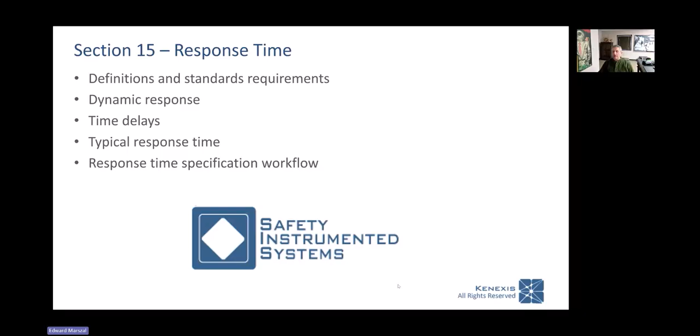Again, this is the SIS training class out of the Kenexis Process Safety Training Center. So a couple things as we start down this timing requirements issue: we're going to start out with some definitions, and then we're going to move into how you determine what this number is for your particular plant.

So we're going to start out with that definition of process safety time. I've mentioned to you before that process safety time is a phrase that is going obsolete. Now, we didn't change the definition of process safety time, because this is embedded - people have been documenting process safety time for over a decade, maybe over two decades. So we can't really change the definition. We needed to create a new one.

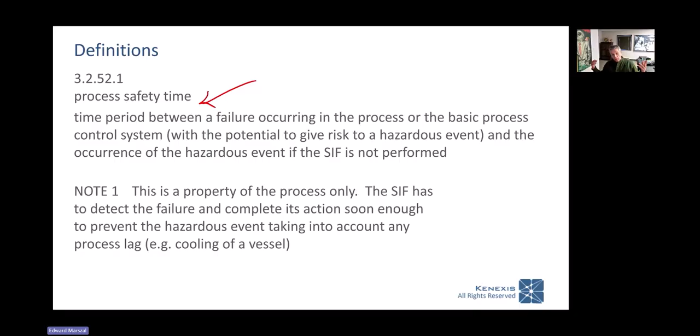So let's start with the definition itself. Process safety time is the time period between a failure occurring in the process or the basic process control system with the potential to give rise to a hazardous event, and the occurrence of the hazardous event if the SIF is not performed. So it's basically how much time elapses between when I have my initiating event failure and when I have my consequence - when I have my explosion, when I have my fire.

That's great. And we have been taught for time immemorial that your safety instrumented function needs to activate faster than your process safety time, which is true - it's always true. But it actually needs to activate a lot faster than your process safety time in a lot of cases, because there is a time that elapses between when my initiating event occurs and when my safety instrumented system knows that it has occurred. And you can't take credit for that amount of time when you're defining what your required safety function performance time, activation time, is going to be.

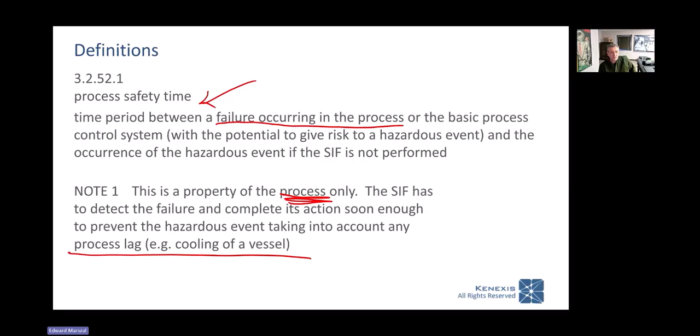Think about a safety function where when you detect that the temperature in your reactor has gone high, you're going to want to flood a cooling jacket with cooling water to try to cool the reactor down. Well, it's going to take some time between when you turn your cooling water pump on and when you actually start to cool the process down - so those kind of process lags. Well, it turns out that there's a lot more lag than just the process lag. I'm going to show you a chart that tries to list all these things out and lets you know what you can actually take credit for.

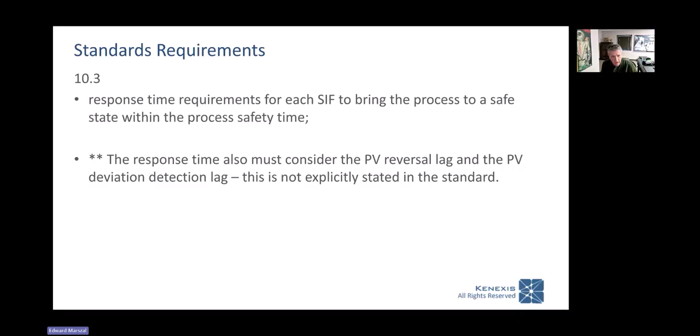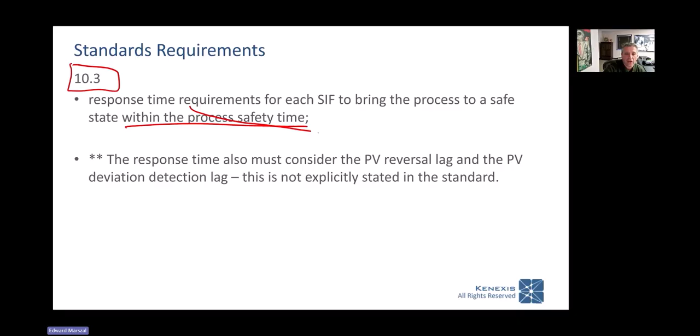All right, some other definitions - or actually it's not a definition, it's a standards requirement that says in clause 10.3, everybody knows that's the list of SRS items, the list of things that you need to document in the SRS to be compliant with the standard. It says one of the things you need to document is the response time requirements for each SIF to bring the process to a safe state within the process safety time. And let me tell you, hear me now and believe me later: the next version of the IEC 61511 standard is not going to say process safety time. It is going to say MERT.

MERT is going to be maximum equipment response time. I was getting ready to write that up on the screen, but I won't. We'll get into that.

There's an extra piece of information here that's not specifically written into the standard, which is that response time needs to include a lot of other items. There's this thing I refer to as the PV reversal lag. When you start injecting cooling water into your reactor, the temperature doesn't immediately drop. As a matter of fact, the temperature is probably going to continue to go up for a while before that cooling water takes effect. That's the PV reversal lag, and that's what the process lag here in note 1 of the process safety definition was talking about.

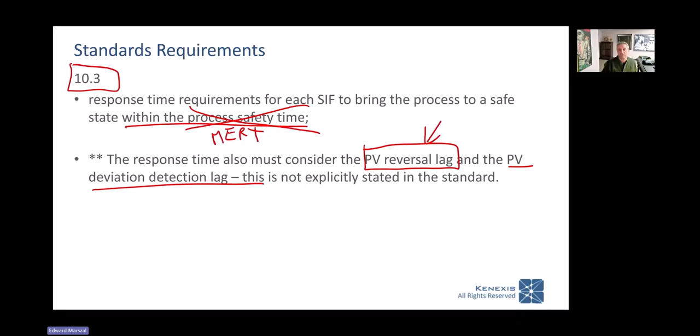There's also the PV detection lag, which is how much time elapses between when my initiating event occurred and when my safety instrumented system actually knows that it has occurred. So when we start talking about MERT in the next version of 61511, the MERT is going to definitely pull this PV detection lag out.

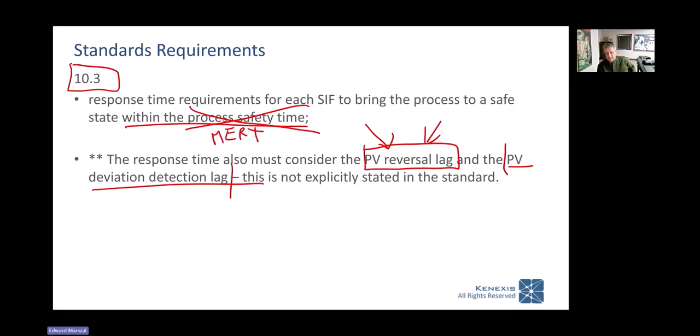We're not completely done with the modifications. I think we need to talk a little bit more in the standard, maybe in the informative annexes, part 2, about the need to consider this PV reversal lag also.

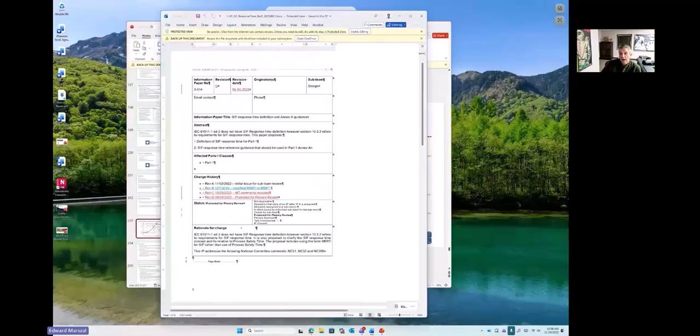Okay, so this is an information paper. What an information paper is, is someone suggested a change to the 61511 standard, and we flesh out what that change needs to be. We discuss it internally, we vote on it, we change it again, and so on. So what you're looking at, we were working on this at our Krakow meeting in Poland last year.

Title: SIF response time definition and Annex A guidance. And basically there's an abstract of what we're doing. We basically said, well, we're looking at the definition of SIF response time in part 1, and we're looking at the definition of SIF response time in Annex A. And it all started out with someone saying, hey, SIF response time doesn't have a definition.

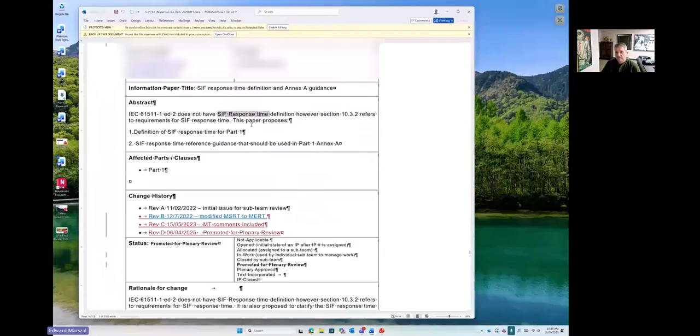So in the next version of the 61511 standard, little secret - well, it's not a secret because I'm showing you - we're going to have a definition for SIF response time. Change history, rationale for making the change.

So we said, well, basically someone on one of the national committees - so the ISA 84 is the national committee for the United States that contributes to the IEC 61511 standard - there were 3 different national committee comments to the tune of, you guys don't have a definition of SIF response time in the standard. You should probably clear that up.

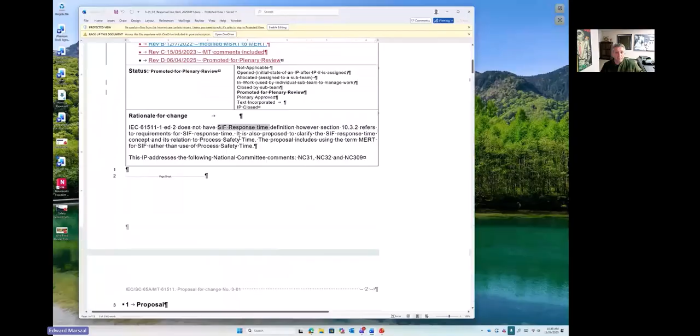And while we were in the process of clearing that up, we said, you know what, the definition of SIF response time is kind of sloppy, maybe we should change it. Long story short, we decided not to change it because there are thousands of companies all around the world that have SIF response time in their corporate standards and procedures and documents. So we can't change it. So we had to come up with a new term called MERT, maximum event response time.

So then basically what you're looking at, and you're going to see people in the standards committee over on the left-hand side, we kind of sketch out how do we want to change what's in the standard, just a little bit at a time. So for SIF response time, this is all going to get added. Or actually, we're changing the definition, we're changing the note.

And even the definition of diagnostics has changed to say that they need to be frequent in relation to the MERT, as opposed to frequent in relation to the process safety time. And then now we have this new definition of maximum event response time.

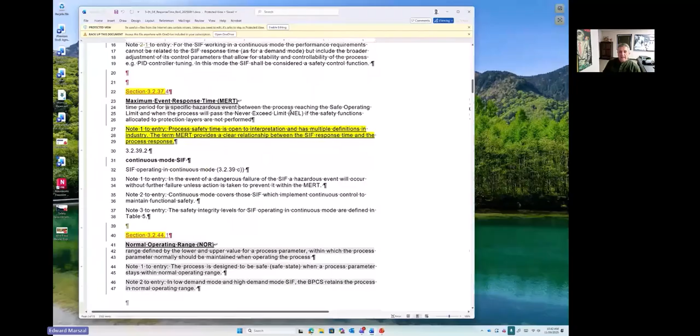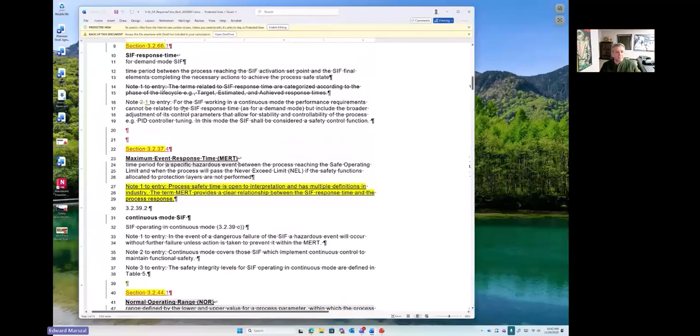So now when we're defining the SIF response time, we're going to want to make sure that the SIF will activate faster than the MERT. So what is the MERT?

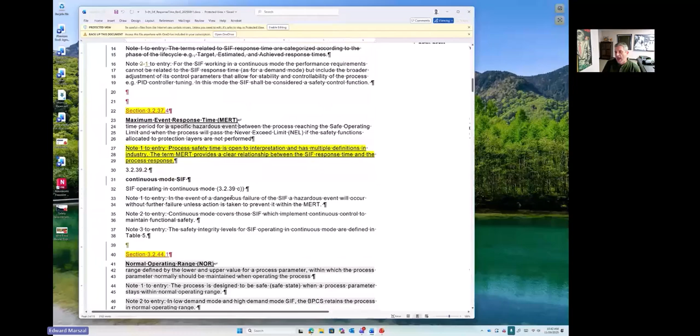It's the time period for a specific hazardous event between the process reaching the safe operating limit and when the process will pass the never exceed limit, if the safety functions allocated to protection layers are not performed. So key here is safe operating limit and never exceed limit.

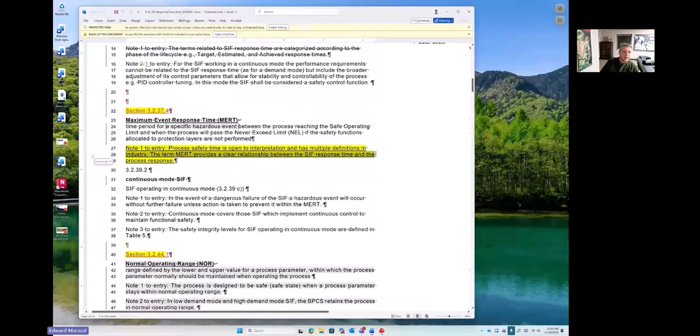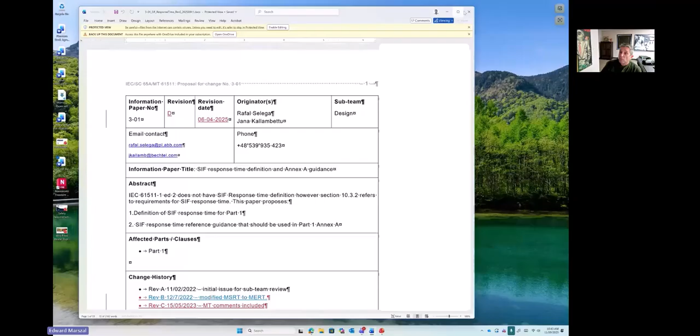So that's what's coming up in the next version of the standard. Now there's a bunch of other stuff that we played with in here, which, you know what, you're just going to have to wait till the next version of the standard is released to get into all those details. I've already told you too much.

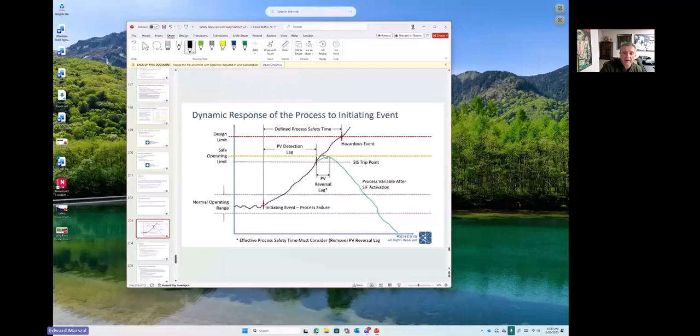Okay, let's jump back in. Actually, let me erase what I just scribbled here before I jump back into the presentation.

Now, some of the other things that you need to think about in this whole process safety time, maximum equipment response time, SIF response time discussion is time delays. So when you're defining a time delay, that time delay is part of the SIF response time.

So if my sensor activates in 300 milliseconds, but I put a 2-second time delay on the safety function, it's not actually responding in 300 milliseconds. It's responding in 2,300 milliseconds. So time delays need to get added up and become another portion of your SIF response time, and you cannot exceed the SIF response time considering the time delays that you put in.

Now, time delays are very valuable. They prevent signal noise from causing shutdowns, short duration anomalies from activating safety functions and potentially putting you into a more dangerous condition. Sometimes you'll be able to perform a manual action if the process safety time is very large.

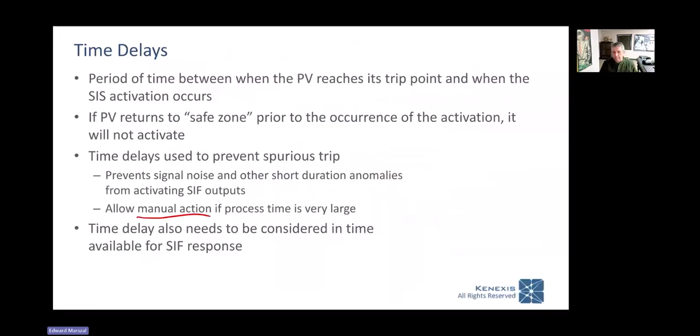So again, that time delay that you're putting in, do not forget that that is part of your SIF response time that you need to calculate and make sure that does not exceed that MERT, or maximum equipment response time.

Okay, so I've got a couple more slides here, and then we're gonna go in and do a deep dive into the fired heater side of the fence. So you've got two options for setting your response times.

The first one, which a lot of you... I could put another one down here, that is guess. Because I was kind of thinking, well, what is the one that's most commonly done in the process industries? And I hate to say it, it's probably this one down here: someone who was a systems integrator, instrumentation and control engineer, putting together the SRS just threw a number down because they needed to get a deliverable out the door. How do you like that for scary? But hey, I'm just telling the truth. I'm just telling you what I've seen out there.

Now, other than your systems integrator guessing what the process safety time is, let's talk about reasonable, rational ways to figure out what the process safety time is.

The first one is the fully quantitative. And being an engineer, engineers love them some fully quantitative. They love their spreadsheets, they love their simulation tools, and they're going to want to run calculations. The fancier the model, the better. Computational fluid dynamics, bring it on.

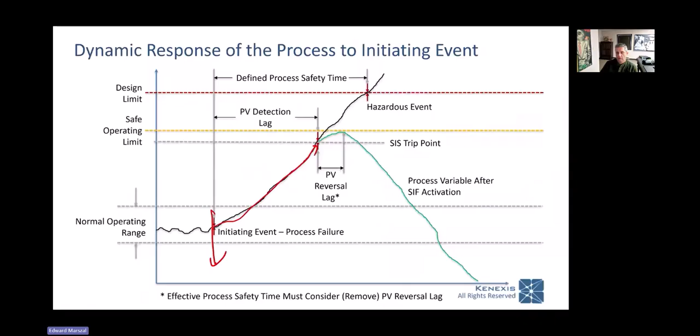Okay, now coming back to fired heaters, there are a few methods that you can use to do a dynamic simulation of what happens inside your firebox. The most sophisticated one would be to use computational fluid dynamics to look at what the fuel gas versus air versus flammable mixture concentration is inside the firebox after you lose your flame.

Very expensive, very time consuming. The other problem with that is there is no consequence until you find a source of ignition, and it is unknowable to determine when the ignition is going to happen. So the best you could do is dynamically determine when you're going to be able to get a flammable mixture.

Okay, so once we do our dynamic simulation, we're going to calculate a SIF response time by summing the actual response times from vendor data. Don't forget to include the time delays and time constants for any smoothing functions that you've done when running those calculations. And then you're going to want to document all this on a per SIF basis.

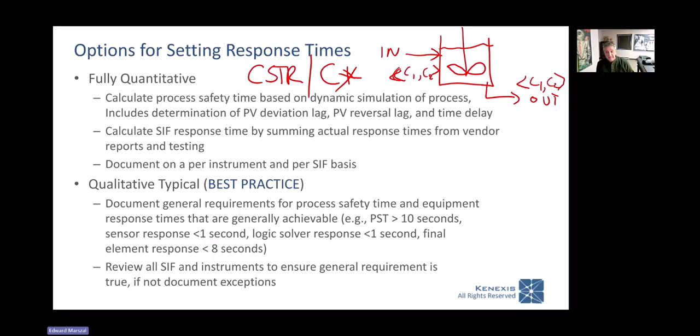Now this reaction is going to come to steady state. If you change the input, you can create a quick and dirty spreadsheet - back in college, that's exactly what we did, to see how the output changes as a function of the input. This is really easy to do because if you remember your good old mass balance, what comes in has to go out. It's a bit more complicated than that, but that's the equation we're running, on a time-by-time basis: what did you put in versus what came out.

Now the problem with the C-star is it assumes the concentration inside that vessel is constant - it's perfectly mixed. As soon as you put something in, it's immediately dispersed around the entire reactor, and thus what comes out is exactly what's inside, which magically immediately dispersed. So right out of the gate, if you're using a C-star approximation to figure out how the concentration is going to grow, it's not going to be accurate because the material inside your fired heater is not well mixed. It never will be well mixed. You know it's not well mixed because...

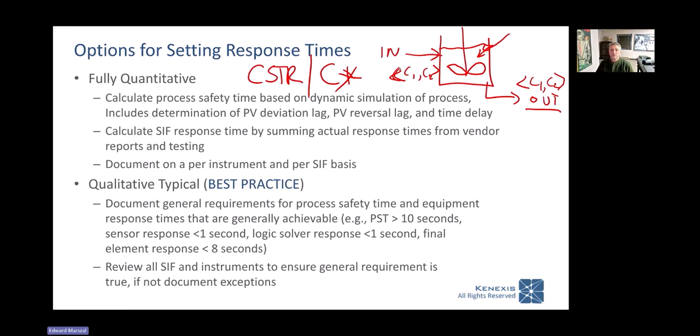Anyway, but I digress. So basically, what I'm trying to emphasize here with a real picture is you're not getting a consistent concentration inside the firebox.

So the next thing I'm going to show you, let me cut this out - this CFD simulation. Now we're going to get into the world of CFD simulations, and at Kenexis we know how to do CFD simulations, we do them all the time. They are very expensive to do, and I'm going to encourage you not to pay us to do them.

But before I get into the main CFD model, this one is really neat. What's going to happen is right now we're modeling five burners putting natural gas into this firebox. This is a simulation of a piece of equipment at the University of Cincinnati.

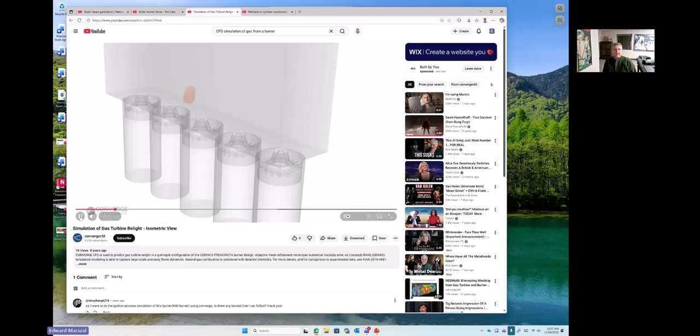Now, right here you're going to see a little discoloration - that's where we injected our spark into the CFD model. And what you're going to see is the flame that results from that ignition, and you're going to watch how it moves through the firebox. So there's our ignition, and in super slow motion, this is the flame front.

Expanding in 3 dimensions, not uniformly, but expanding. This is something everybody's familiar with - I'm going to use burner A to light burner B to light burner C, and so on.

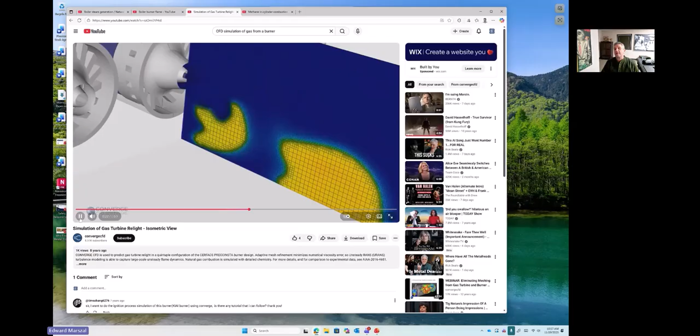So that's a CFD model of doing something you should never be allowed to do. Here's another view of what's on fire, what's not on fire. I thought that was kind of cool, but what I really want to focus on is this CFD model here, which is methane in a cylinder.

Basically what we're going to show is the CFD - and I'm going to pull up this simulation also to show you what's happening to the methane in the firebox, and why your C star is an approximation.

God love us all, us engineers, because the more decimal points of precision I have in my spreadsheet, the happier I am. But we will always willingly turn a blind eye to the ridiculous amount of error that says even the first digit in that estimate is so far wrong that none of the other digits matter.

All right, so let's take a look at what it looks like inside the firebox when you inject methane. Now, Kenexis did a CFD model exactly like this for one of our customers who did something really stupid.

They had a systems integrator who did an SRS for them. And in the SRS for the fired heater, that systems integrator did what a lazy systems integrator does - they said, yeah, for your fuel gas valves, we want tight shutoff.

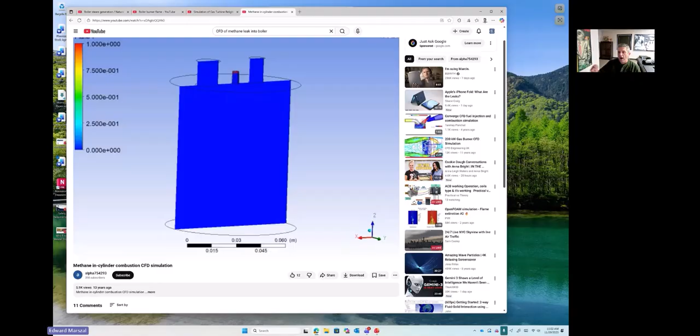So let me back up to the beginning here. This is kind of like time zero. I've got my firebox, and now I'm going to inject methane into that. What does that look like?

Let me stop my simulation. For those of you looking at the model, the color represents the concentration of the methane - the hotter the color, the higher the concentration. It might be mole fraction because we're going all the way up to 1.0, so we might actually be looking at mole fraction of methane.

Okay, so as this flame develops, what do you see here? As time progresses, nothing's getting mixed here.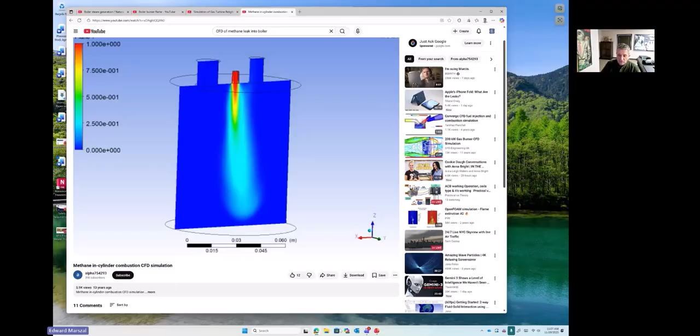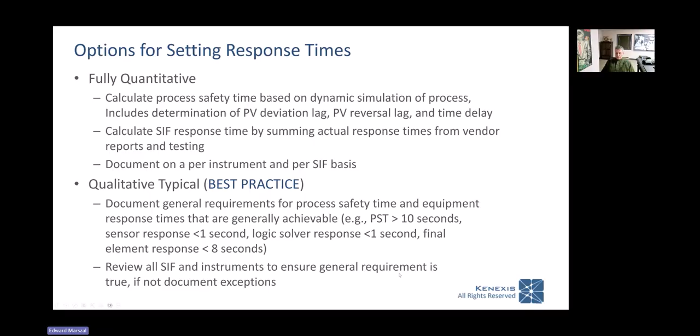So this CFD type of modeling is very expensive, very difficult, very time consuming. What, Ed, do you recommend I do instead of that? Well, I recommend that you do the qualitative process, which is why I went ahead and said that this is the best practice.

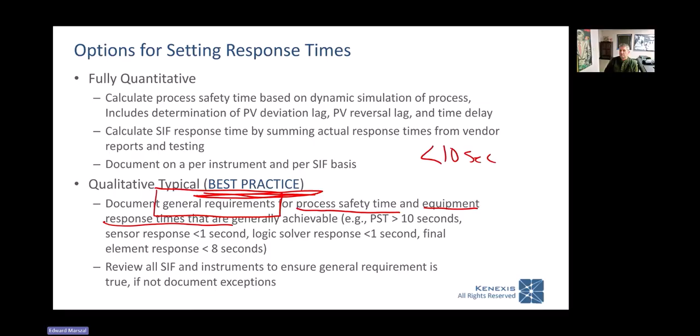So what you want to do is generate your requirements for process safety time and equipment response times. For those of you that know Kenexis, if you've seen any of my discussions for SRS, you know that I am a big fan of general requirements. So I can one time, in a general requirement, say that my process safety time is always going to be less than 10 seconds. Sight unseen, you can just assume that the process safety time is going to be less than 10 seconds. Why did I pick 10 seconds?

Because your equipment, your SIS response time, is also usually less than 10 seconds, significantly less. Most of your valves are going to be 6 inches or under. If you go with a conservative stroke time of 1 inch per second, that's going to be 6 seconds. Your PLC is going to turn around in a few hundred milliseconds, and your transmitter is going to turn around in a few hundred milliseconds too. So about 7 seconds is realistic for what you can expect.

So in this fully quantified approach, if you go to your process engineers and say, I need you to calculate a process safety time for me, they're going to spend hours running HYSYS models to give you a number. And the number they might give you might be something like 45 minutes, or 10 minutes, or 1 minute.

You could do that. But also, while you're in the PHA, while you have your HAZOP team together, you can simply ask them, while you're looking at the LOPA scenario for a hazard, how long will it take for this hazard to develop? Or even better, ask will it take more than 10 seconds? And 99 times out of 100, your LOPA team is going to say it's going to be like 10 minutes or 20 minutes, way more than 10 seconds. Well, guess what? That qualitative statement from your LOPA team gives you, the equipment engineer, the SIS engineer, everything you need to know.

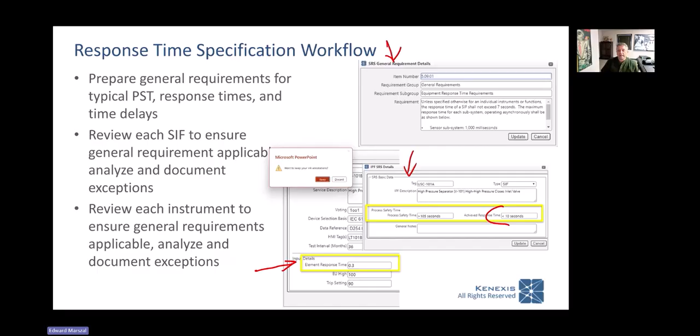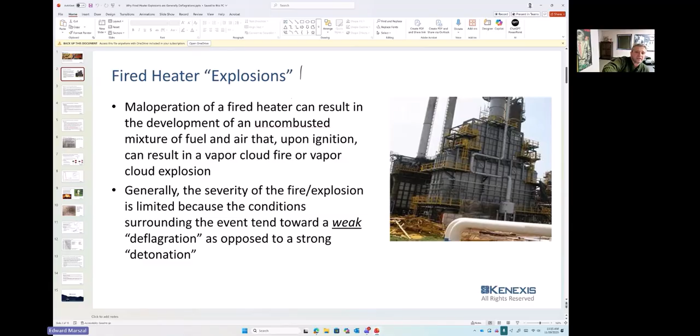All right, so let's go back a little bit now on the fired heaters. Look at the fired heaters in a little bit more detail. And I'm going to bring up, again, there's a whole hour plus webinar on this topic, fired heater deflagrations, and why they're generally not as violent as you think they're going to be, and why some of these CFD calculations, the assumptions are just... all right, I think I've pled my case there. So I'm just going to hit some of the high points here. So fired heaters, and you'll see I put explosions in quotes here.

If you don't operate a fired heater properly, you can get an uncombusted mixture of fuel and air that upon ignition can result in a vapor cloud explosion. Generally, these things are weak deflagrations, they're almost never a detonation. And if they are a detonation, they're probably going to be a weak detonation, not a strong detonation. In order to cause a fired heater to collapse—now, I am not aware of any instance ever of a fired heater exploding to where it threw shrapnel everywhere like a Hollywood explosion you would expect to see.

The worst of the explosions caused a collapse of the structure of the fired heater, and it basically fell down. Unfortunately, it fell down on top of the people who were underneath it lighting it.

Yes, Chris, okay, we got a question in the chat here. Any tips on how to expand this criterion to cover operator intervention response? And would a qualitative, experience-based gut feeling approach also be valid? Okay, so...

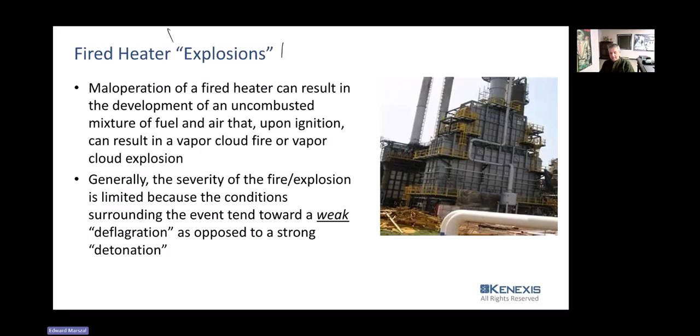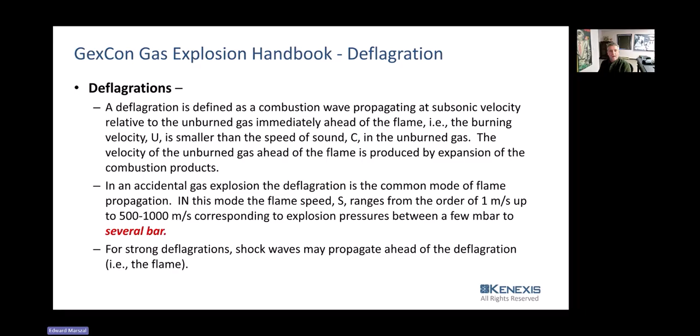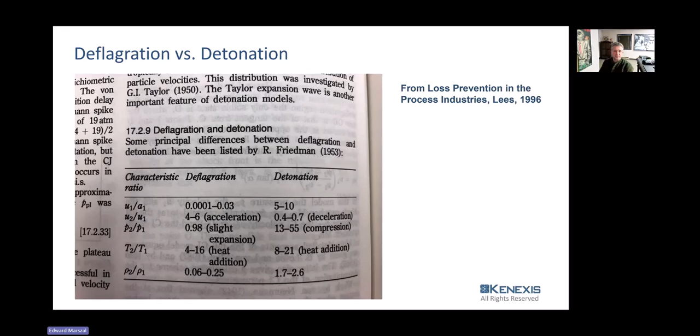Go to the CCPS process safety glossary if you want to know what these terms mean specifically. Here's the definition of a deflagration versus a detonation, and a little bit of information out of Lees about the differences between them from a mathematical perspective.

TNT, it's dynamite, as the boys in AC/DC used to say. Actually, they still say it. Some of them still say it, not the singer. Boy, I'm going off topic. Actually, TNT is not dynamite. Dynamite is nitroglycerin mixed with a clay binder to kind of stabilize it.

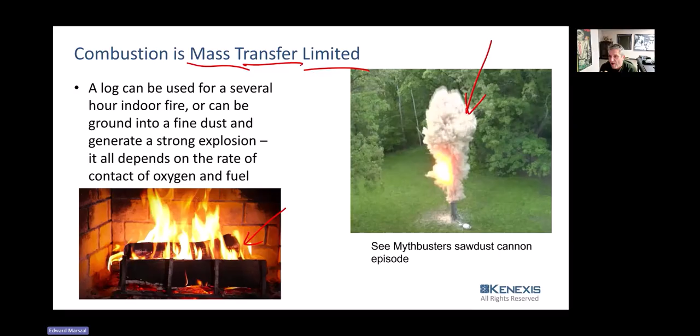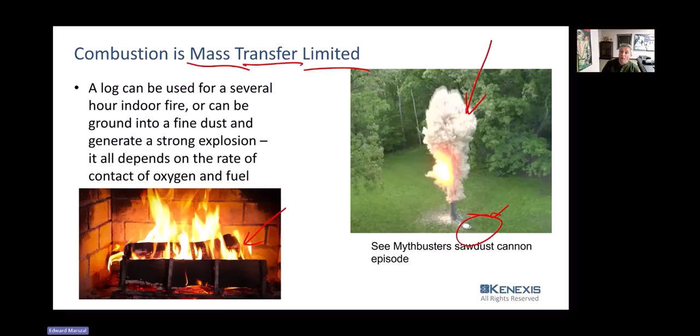Now, if you want to speed things up, shred that log into a super fine powder, mix it with oxygen, and shoot it out a tube to get a nice, well-mixed gas cloud and ignite that. And oh boy, you will get a vapor cloud explosion.

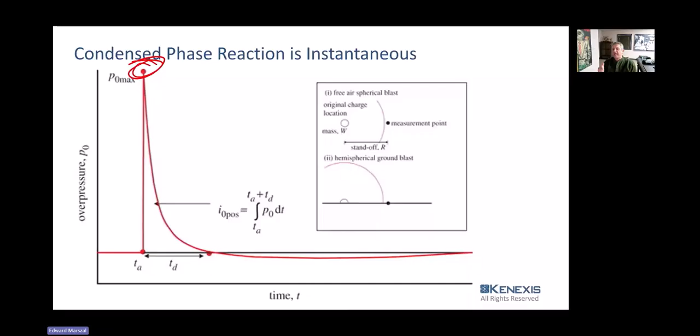The key is inside your fired heater, that pressure builds up over time as the flame expands, as opposed to TNT where everything happens all at once. The entire reaction happens in a microsecond, everything burns, whereas in a heater, only as fast as your flame front expands is how quickly the pressure can build up.

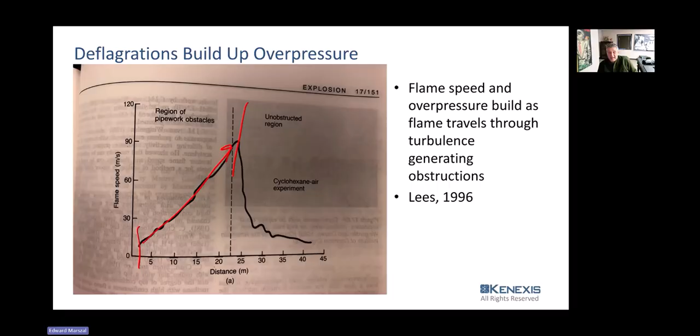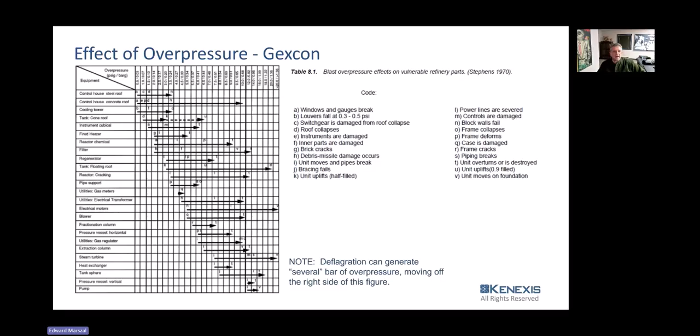If your flame speed doesn't go supersonic, it's probably going to be a whole lot of nothing in terms of the consequence you end up with. I don't want to go into the weeds on flame speed, flame velocity, and effects of overpressure, but summing it up, in a fired heater it's a vapor cloud explosion, not condensed phase. Most of what's in the firebox isn't going to burn in the first place if you're using air. Methane combustion doesn't change the moles of stuff in the firebox, so only the heat differential contributes to the explosion.

So yeah, you're not well mixed, you're not near stoichiometric. The combustible material only fills a portion of the firebox, not the entire firebox. There aren't obstructions inside, well, there are obstructions along the wall of your firebox. I should be careful, you really need a lot of obstructions in your flame's path to get that flame to go supersonic.

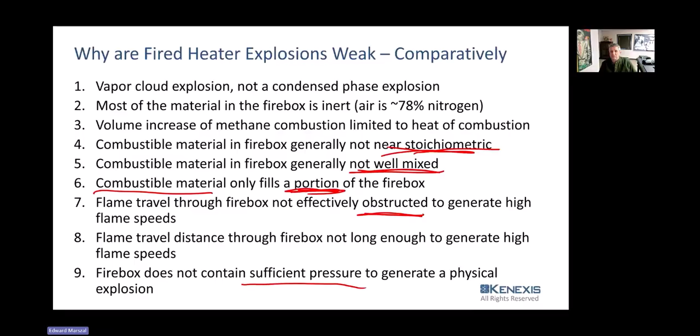Your firebox is going to collapse real quick. You've got explosion doors. It's not going to contain enough pressure to really generate a lot of physical damage if your explosion happens when the box is hot.

So if I could, let me go back to the conclusions, where the rubber meets the road with respect to process safety time. I'm going to recommend that you look at the qualitative approach.

Set a qualitative limit for a maximum or minimum process safety time, or maximum equipment response time. In the LOPA, get the team to qualitatively confirm that time is not being violated. Or if they can't confirm it, that's when you assign a process engineer to figure out what the MERT or process safety time actually is. It should only be for a tiny portion of your safety instrumented functions out there.

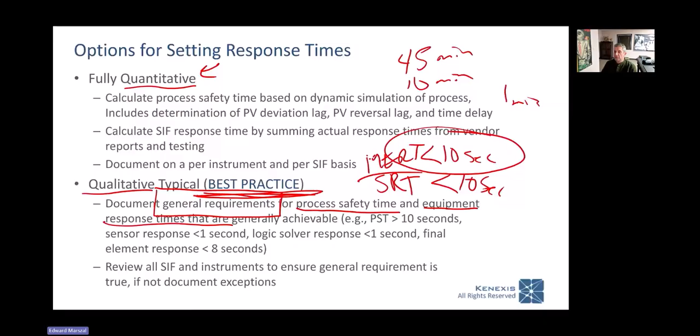If you do need to do a quantitative analysis, you have to, but it should be a small portion. The big kicker on setting this MERT is knowing how quick your equipment can respond. Just ask the team: if you know your burner management system is going to turn around in less than 5 seconds, tell your team, do I have 10 seconds? Qualitatively, can you confirm that, yes or no? Document that in your LOPA, and you're good to go.

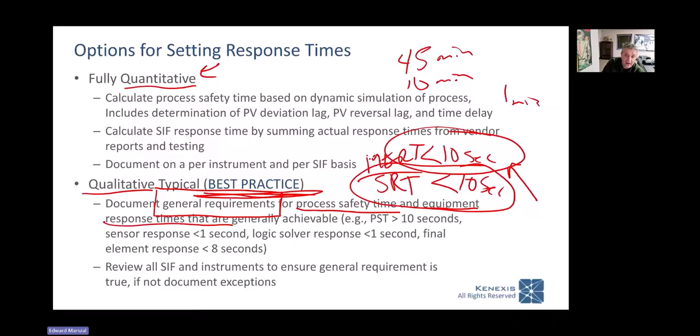I will go ahead right now and open up the floor to any other questions anyone else might have.

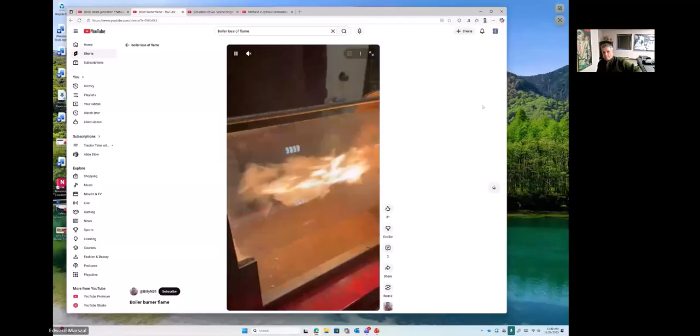Thoughts on documenting the process safety time as NA in the SRS, since we don't know when ignition will occur, and stating the response time of the SIF will conform to the performance criteria outlined in the appropriate industry standard?

You know, I have never considered that. That's not a bad idea, in that you're basically deferring to saying there is an industry standard out there which sets my criteria, and I'm going to use that instead of running any other calculations.

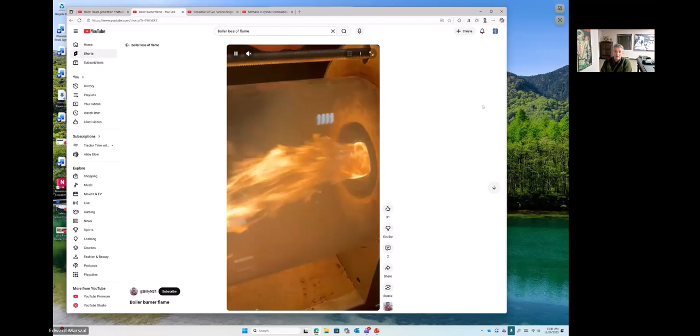The other thing you could do is just set the maximum equipment response time to what the standard says your SIF needs to comply with, and run it that way. I don't know how comfortable I am using not applicable for process safety time or maximum equipment response time, but I'd definitely be comfortable just taking what came out of the industry standard and saying, this is my maximum equipment response time, with a note that says per API 556 or per NFPA 85.